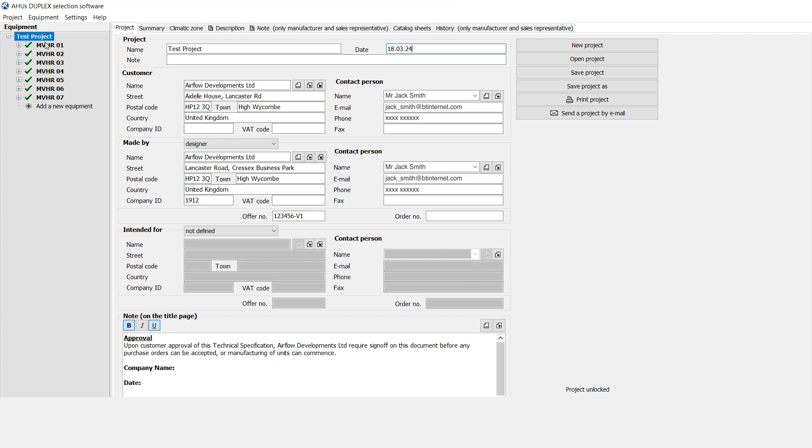Today I'm just going to show you all how you finalize your project on Airflow's MVHR selection software. So I have a demo selection here where I've put together a test project.

MVHR1 is one of our Duplexvent PS models, which can be either floor-mounted, ceiling suspended, or externally roof-mounted. We've got MVHR02, which is our Duplexvent PT model, our vertical stock standard product, a very compact vertical heat recovery unit. We have our Duplexvent Multi-Eco, which is our bespoke unit, suitable for ceiling suspending, floor standing, various options of water heaters, electric heaters, DX coolers, water coolers.

We have our Multi-Eco V, which is the vertical version with all the spigots from the top. Our Multi-Eco N, which is our rooftop model. Our Rotary thermal wheel. And our Rotary N thermal wheel, suitable for externally mounting.

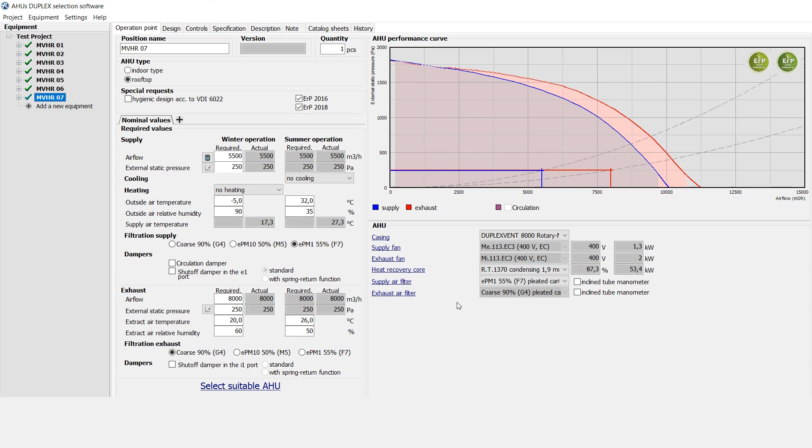So once you're happy with your selections, you would go to Project and Print. This is then going to export a full technical specification for you with all the product details. You see here I've got all the units selected at the moment. You can deselect one if you only wanted MVHR selection for one unit or for several, but it's best to have all the units selected.

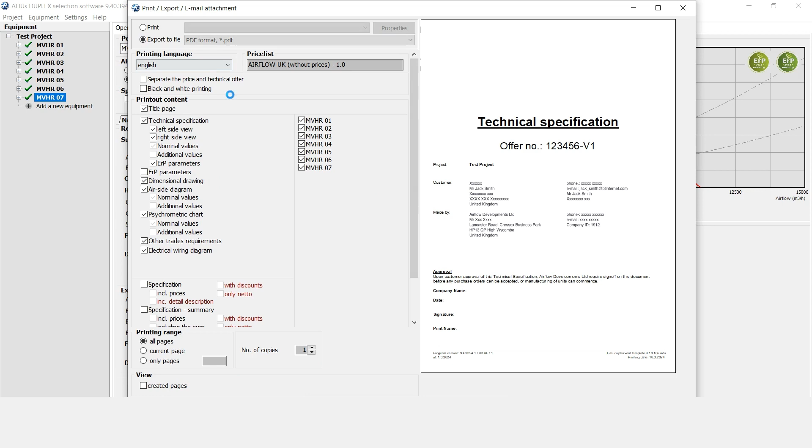And then across on the left you've got the options of what you want for the exported technical specification. Again, it's best practice to keep all of these selected. Once you're happy, you'd go to export to file and you can print to a PDF. The PDF then prints out like this. You've got the technical specification here.

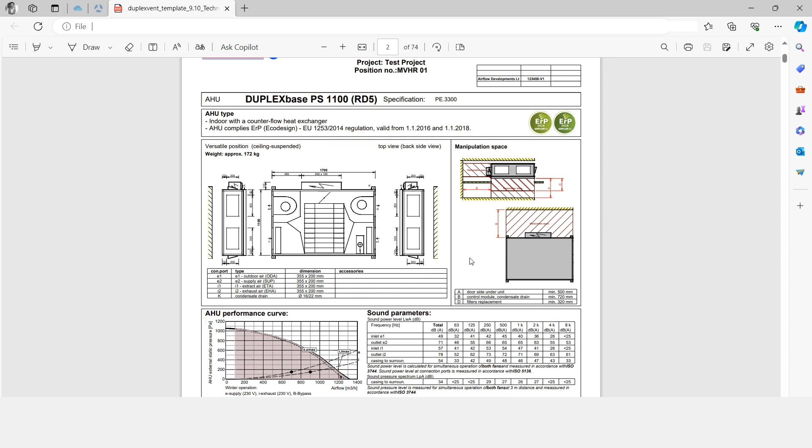For display purposes, you've got my details and Airflow's details here, but you'd have the customer details, for example, at the top, and then your details, or again, Airflow, the manufacturer's details, as made by. First page is always an overview of the unit with a dimensional drawing, fan curves, noise data.

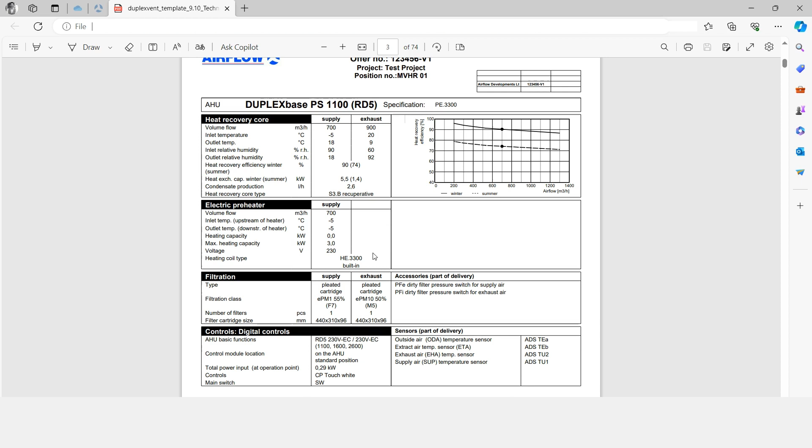You've got the heat recovery section, so it's showing here this is 90% efficient in terms of the heat recovery based on -5 outside. You've got electric preheater selected on this one built in, and the filtration details there, controls, ERP data, and then dimensional drawings again, details of the heat recovery in both summer and winter, psychrometric charts, finally installation details and wiring diagrams.

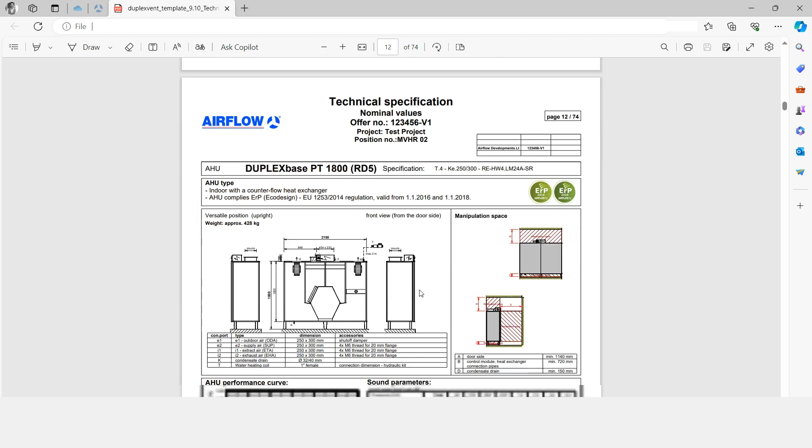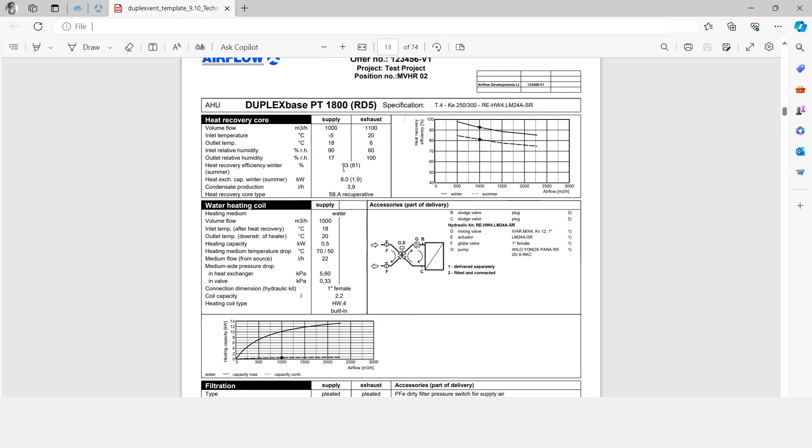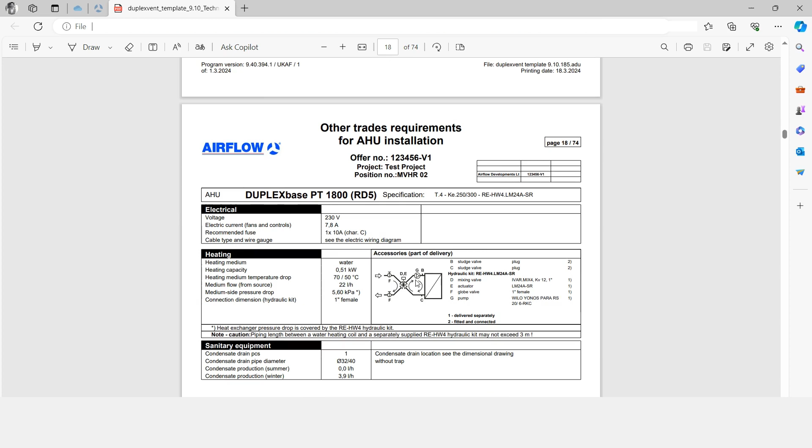This stays the same for all the models, so you've then got the PT, which is the vertical unit, the fan curves and noise data. Here we've got details of a built-in water heater coil, the heat recovery. This one's at 93%. Filtration, controls, ERP, dimensional drawings, psychrometric charts, details of the floor mounting kit, and the wiring diagrams.

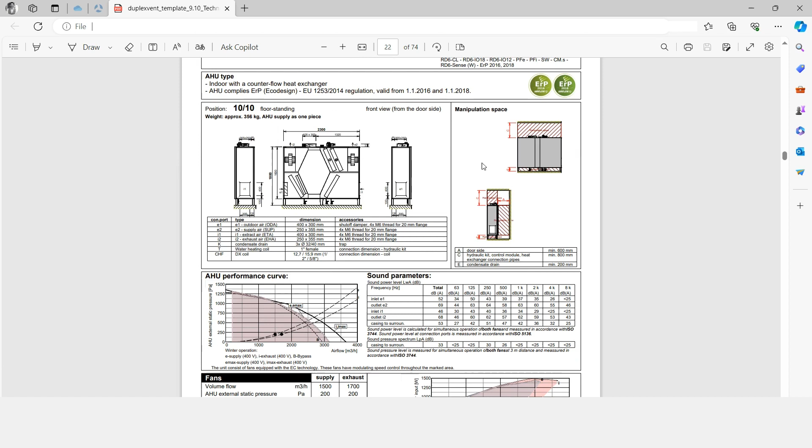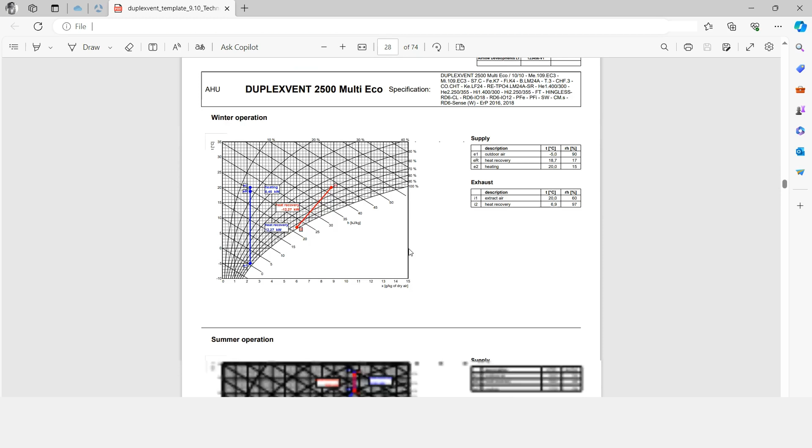We've then got the Multi-Eco. See here we've chopped and changed the spigot connections around. Shows you the maintenance space, the fan curves, noise data, heat recovery on this, 95% based on the selection we've gone with. Water heater built in, DX cooler built in, filters detailed, ERP, dimensional drawings, summer and winter operation, psychrometric charts. Then as we keep going down, the wiring diagrams.

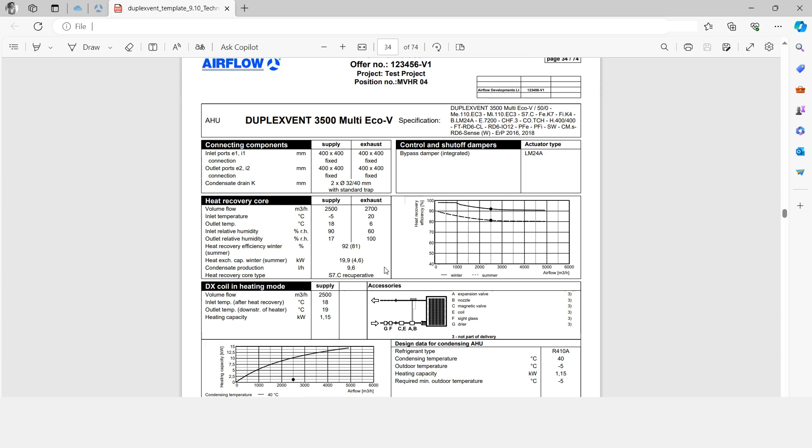Then on to the next selection, Multi-Eco V, the vertical version. Again, same options. This time we've got a heat recovery of 92%, DX cooler and electric heater, psychrometric charts. Finished with the wiring diagrams. Multi-Eco N, which is the external version. Again, same details. Multi-Eco N heat recovery is at 96%.

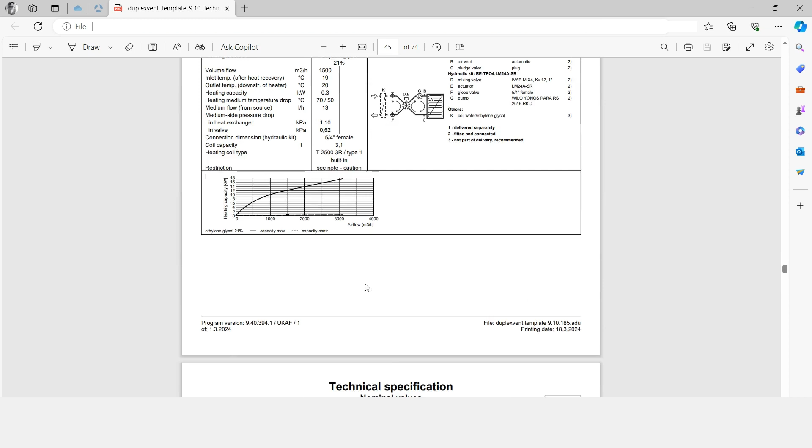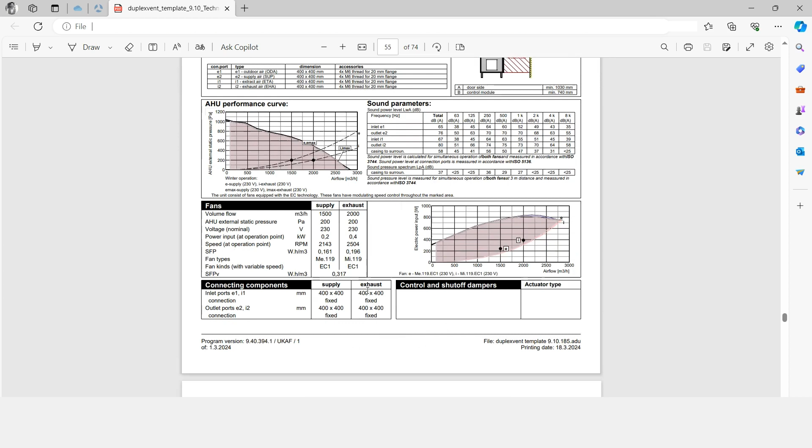And then towards the end, we've got our Rotary thermal wheel units. This is the 2500, very compact Rotary thermal wheel. And finally, we have the external Rotary thermal wheel unit. Larger units do come in 3 sections to be easily mounted on site. Just to see, heat recovery on these is up to 87%.